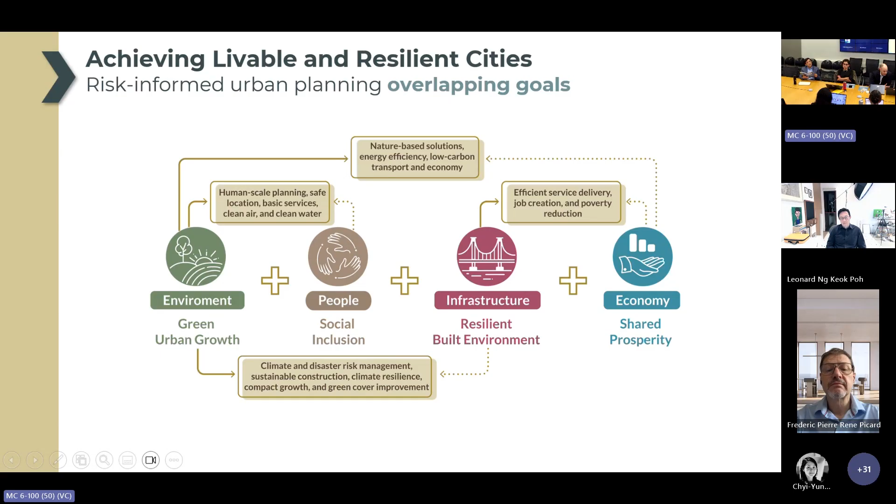We started out the presentation by showing how, as we're familiar with and how we tend to think about it, urbanization is commonly thought of as a driver of increased risk. This is what we're seeing around the world. But what we really are aiming to do with this publication is present and demonstrate how we can think about urbanization with a paradigm shift, to not be only a driver of risk, but actually as a driver of greater capacity and as a catalyst for greater resilience, if done so with better and more informed, more risk-informed urban planning.

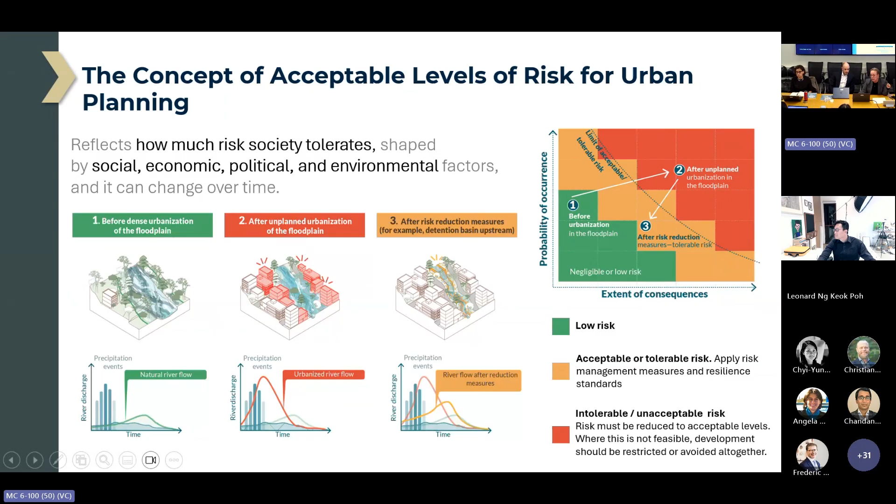So you will need to promote more risk reduction measures to be able to promote your development. Also, an important aspect of this concept is that risk is a dynamic factor. In an area that was not urbanized, that had a very clear floodplain, you can promote development very easily. But as urbanization happens, the dynamics, permeability, and conditions change. So those risk studies have to be updated with certain frequency, and the recommendations should be updated accordingly.

As mentioned before, this is an integrated process that combines different instruments: regulatory instruments like zoning, land use regulation, graduated planning, building codes, with financial and land management instruments that share the economic costs and benefits of urban transformation between the public and private sectors through land value capture, transfer of development rights, green financing instruments, or disaster risk financing insurance. This is complemented with compliance incentives like reduction of construction permit processing time and fees, and with capacity building to generate awareness and the capacity to develop the technical studies and risk reduction plans that are needed.

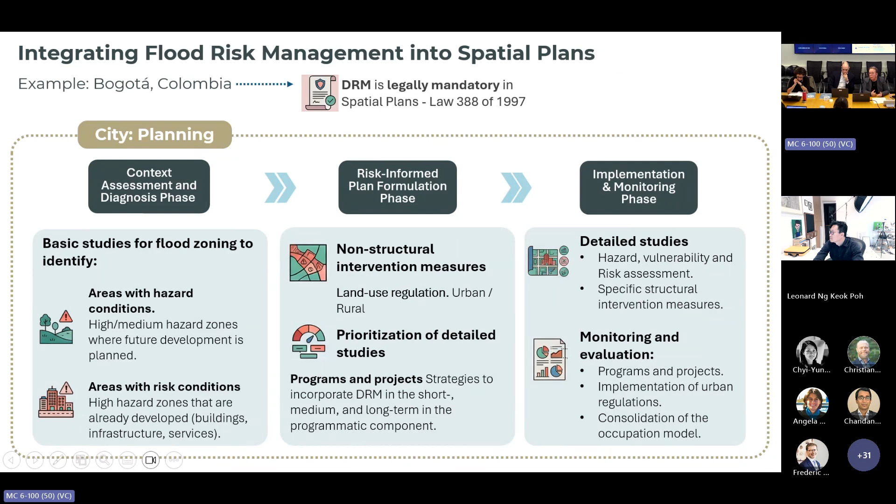As I mentioned before, during the diagnostic phase the city conducted hazard and risk studies in built and already occupied areas, and hazard studies for future development and areas of expansion. Based on those studies, during formulation, non-structural measures related to land use regulation, density, and type of uses are taken, along with prioritization of the detailed studies that are needed. This is accompanied by a program of investments for disaster risk management in the short, medium, and long term. During implementation, those detailed studies are carried out, along with specific structural measures, monitoring and evaluation of the programs, and enforcement of the regulatory measures from the urban development control perspective.

This responsibility is shared among different stakeholders. The city started with the official maps, included in the territorial development plan and the territorial development law, but this is shared with the developers. When a new urban development is proposed, they need to conduct mandatory risk assessments according to the technical recommendations of the Institute of Disaster Risk Management in Bogota. The results from the studies, the risk reduction measures, are reviewed by that institute, and if they comply with the terms of reference, depending on the results of the risk studies, if risk can be demonstrated to be lowered, the developer is allowed to continue with the license processing and implementation of the risk reduction measures.

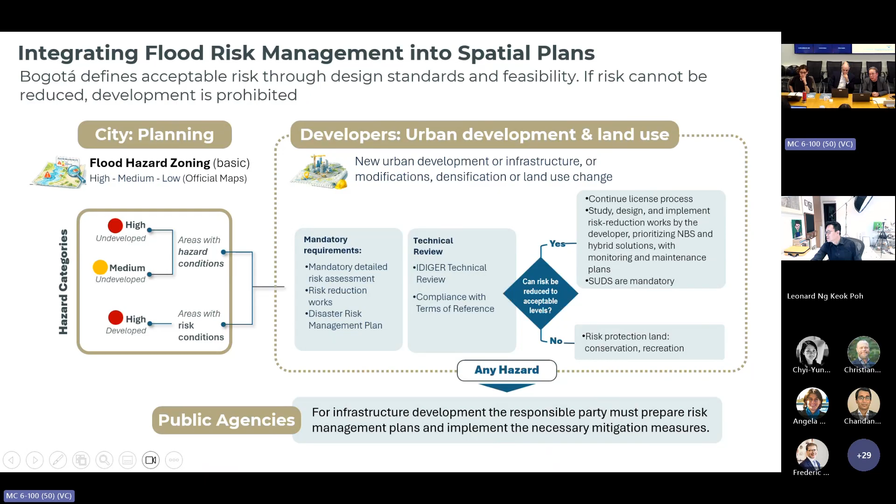Sustainable urban drainage systems are mandatory to lower, for example, the pressure on the stormwater system. It is also a shared responsibility between the city and the developers, while the public agencies are responsible for developing the main infrastructure and implementing the main mitigation measures.

Bogota is a very large city, divided into 20 localities or sub-municipalities. The minor localities are also responsible for developing more detailed studies for the smaller rivers and creeks, and based on those studies, defining the different types of measures and implementing risk reduction measures, implementing development control processes.

Complement this with all types of nature-based solutions, early warning systems, and risk reduction activities. One important aspect that makes this possible is that the city of Bogota has decided that 0.5% of the annual budget should be allocated for risk reduction. These progressive studies and risk reduction measures can be planned ahead and implemented because they don't depend on the current administration or political will. It's a progressive element enabled by a law establishing a mandatory budget.

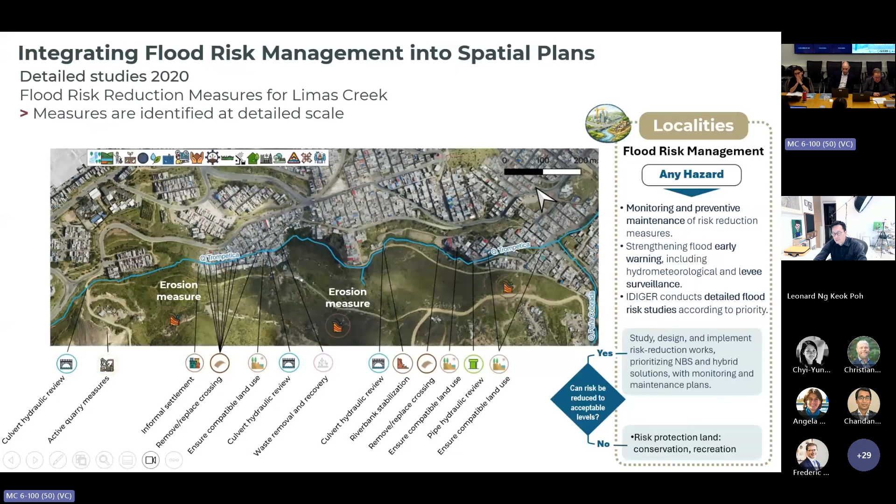Risk-sensitive land use planning is not an easy process. It requires strong governance, technical capacity, and financial and long-term sustainability. But we hope that the handbook will provide some examples on how to manage this for different hazards and help us scale up to resilient, sustainable solutions in the urban context, connecting people with opportunities for jobs, promoting private sector development, and promoting long-term economic development for our cities. Thank you.

Thank you very much, Anna. Every time Anna speaks, everything makes sense. But we know that in many of the client countries or the places we work, we're far from getting a law like the Colombian law that provides funding and mandate to do this.

We have the privilege of having today two speakers that will share with us how this is being done in real cities, with real populations, with real legal systems that sometimes help or maybe not so much to do this. Let me introduce our first speaker. I hope I am pronouncing this correctly.

Leonard Ng Keok Poh is a director for APAC at Henning Larsen. He joined the firm in 2008 and co-led the establishment of the Singapore office. He became a partner in 2016. His work focuses mostly on landscape-based, water-sensitive urban design that integrates flood resilience, public space, and sustainability into planning. In 2023, he received Singapore's President Design Award, Designer of the Year, which is the country's highest honor across all design disciplines.

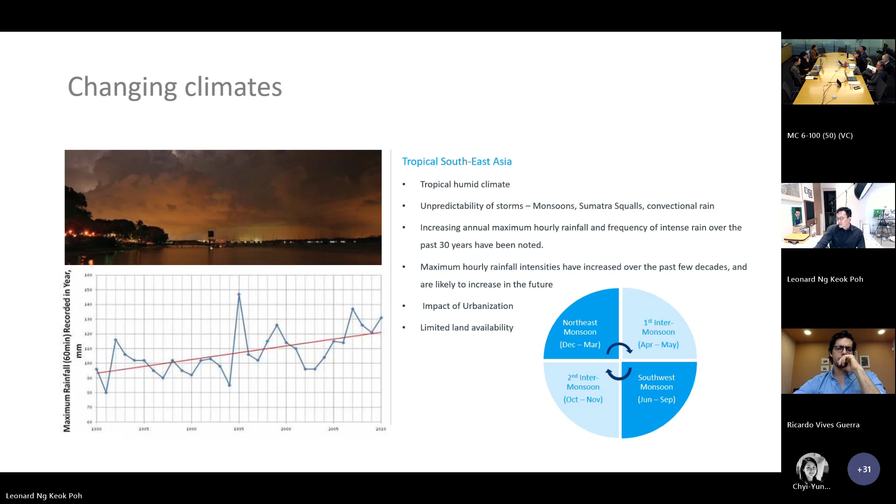I'm going to start by talking about the obvious, which is the fact that there is clearly a trend in climate change. We are seeing in Southeast Asia at least a significant change in weather events. We are having much stronger storm events where the original grey infrastructure suited for the rainfall is now overwhelmed. So there's a need for a mindset shift from an engineering-only based design to one that includes the combination of engineering and nature-based solutions. If you see from this diagram, it will show you that we have to embrace our whole physical environment as potential for stormwater management.

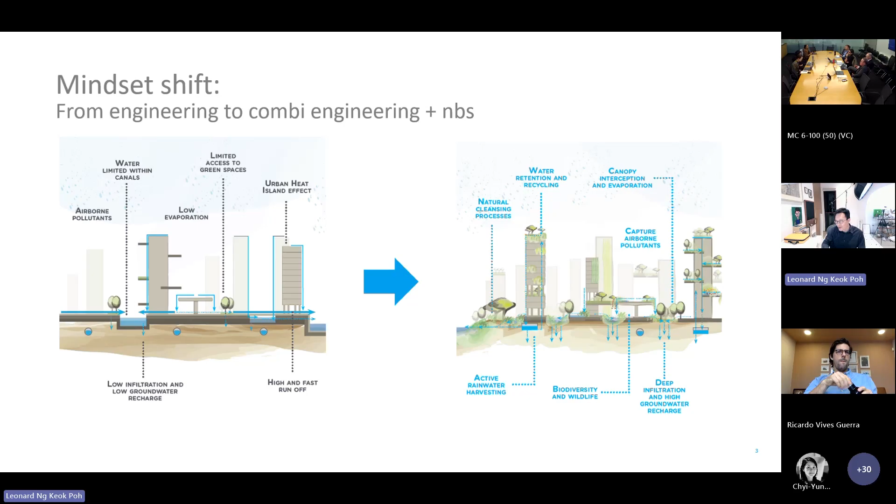This includes managing from source, pathways, and receptors. The old strategy is to get rid of water as soon as possible, but when it reaches downstream, it overwhelms the existing system. The entire urban space is actually a potential solution, including remediating how we control stormwater on site.

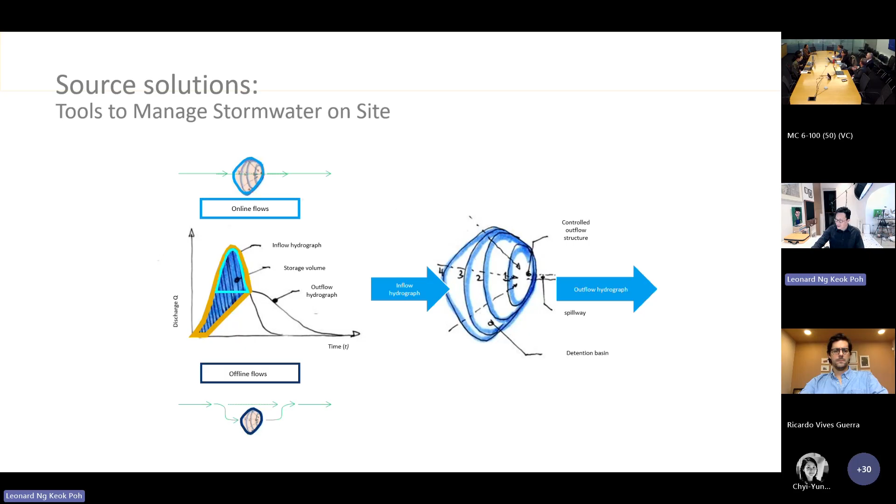That includes the use of a variety of solutions, and these tools allow you to control both the quality and the quantity of the water. It is only successful if you can create a treatment train to both improve water quality and remediate flood.

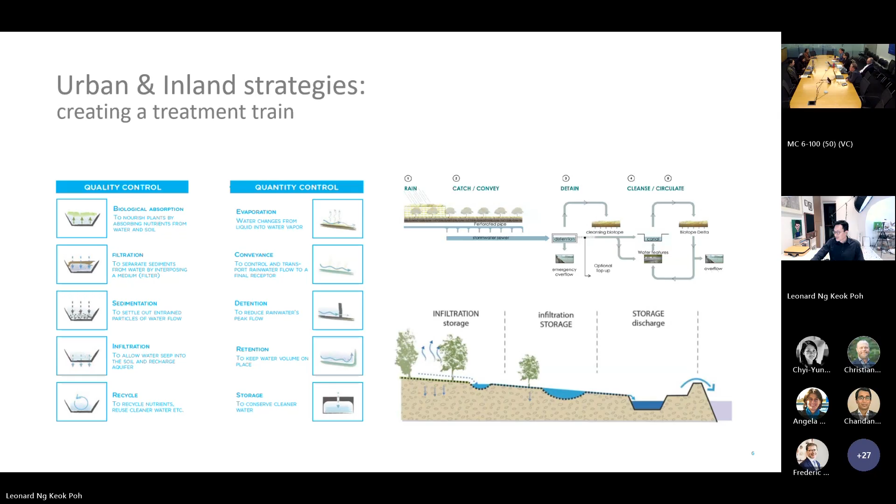But for this to happen, you need an all-of-society approach to solve this problem. I'll cite the example of Singapore, where there's a multi-agency effort, first managing the stormwater in a catchment, which is the purview of our water agency called PUB. They manage all the stormwater that falls within a catchment, how it moves through the system, and where it is managed and stored.

They're also in charge of handling storm surges that come in from the sea. Sea level rise combined with more high-intensity storms is what causes the intense flooding we see in many cities these days.

Then there's our master planning agency called the URA. They plan around the drainage plans imposed by the Public Utilities Board. They have the master plan that controls our 20-year planning horizon, and after that, at the next scale, are the development guide plans imposed on private developers.

Then contributing to all this planning are the quasi-government agencies and private developers, who take all these guidelines and realize them within development plans. With this all-of-society, large-scale implementation, only then can you actually address the issue of flood risk.

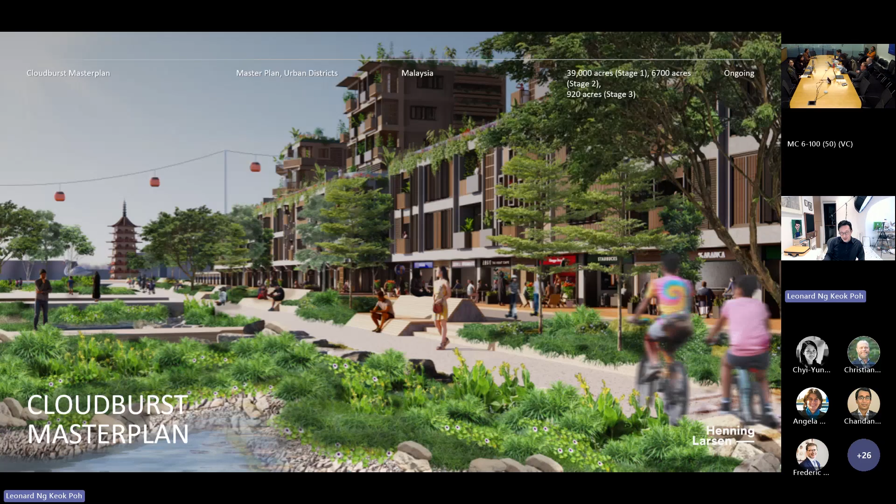I'm going to show you an example of a project we are doing for a city in Malaysia. This city is in Sibu. It is very low-lying, near the river delta - you can see it's next to a river. Due to climate change, it floods a few times a year, serious flooding that is impacting the economic viability of the city, but it's also causing a drain in the population. People are moving out because of climate risk.

The problem is compounded because it's built over peat soil. The soil is soft, saturated with water, and next to a major river. So how do we come up with a development that can deal with the risk inherent in such a vulnerable environment?

The first thing we need to do is engage with all the valid stakeholders, the people who are there, the ones most impacted by this vulnerability. We talked to the villagers, the government officials, and the town officials, and gathered a wish list from them, so we can keep that top of mind, because they are the ones who would actually benefit or suffer from any decisions made.

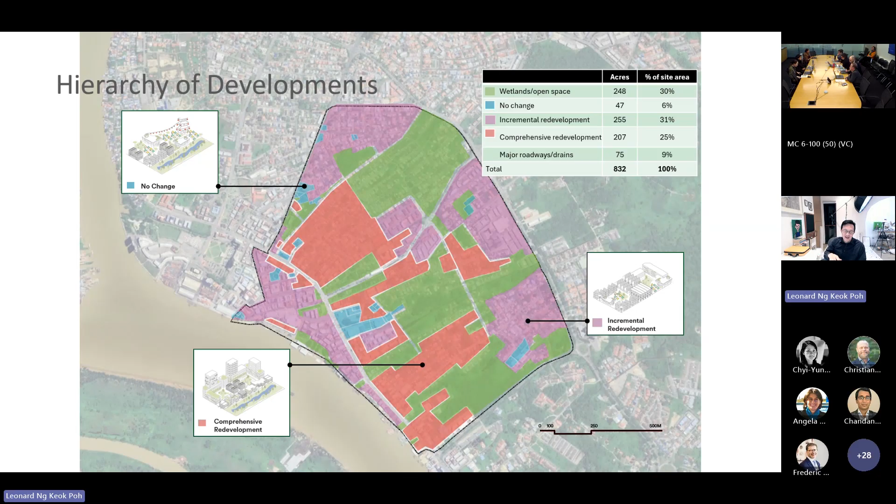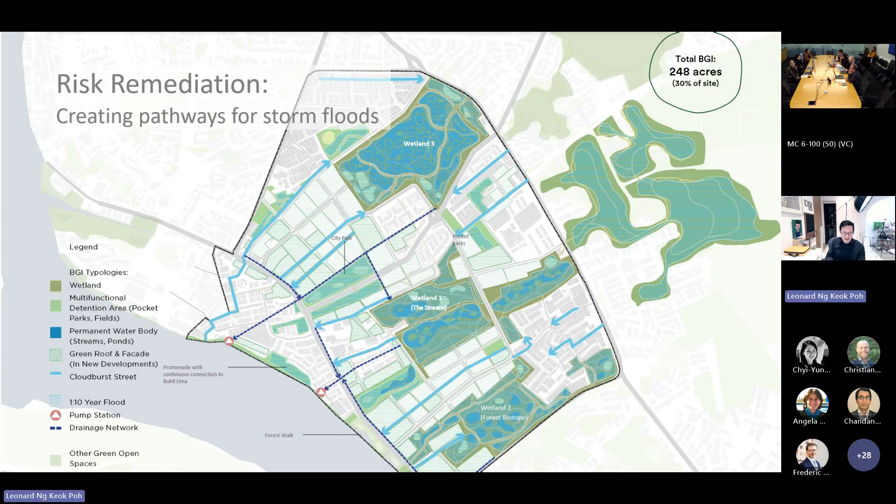Then we have risk remediation. In this case, we are creating pathways for storm floods. So in this new urban fabric, where can the water move so that people are not overly impacted by climate change?

We create visualizations to help the public understand what they will be getting. In this case, you do not have to sacrifice your livability to be able to live with water. In fact, we are visualizing a new typology where people can live with the environment in harmony, where animals can roam freely and have protected zones, and people can still have recreational areas.

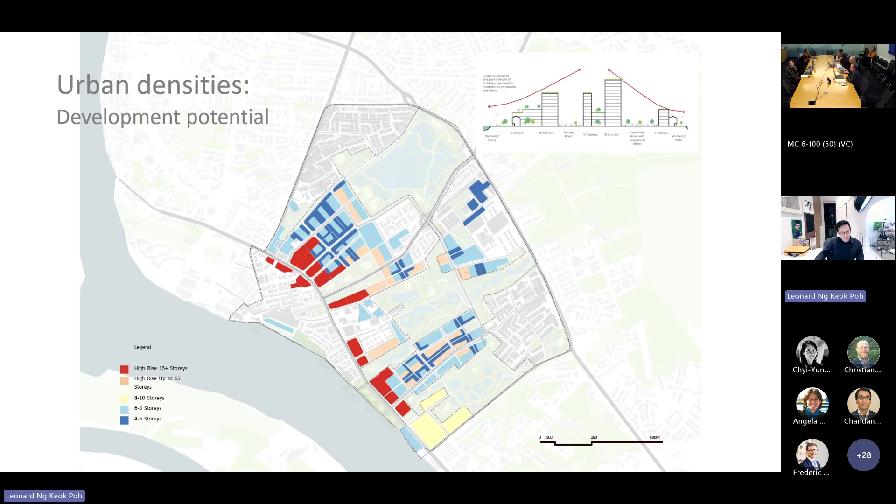It's also important to collect data to understand the development potential, because we cannot dedicate all land just for flooding. We have to provide spaces for the city to grow and to prosper. This is a density map showing the different levels of development.

This is the overall master plan framework at the end of this exercise, where we list out where they can develop, where they cannot develop, and where they can have higher levels of development. What is the relationship between this development and the nature areas and flooded areas?

And finally, this is a visualization of how this new city can look - a city where humans can coexist with nature, where climate change did not disrupt daily lives, where there's a space for nature and a space for water to coexist.

There's one stage that a lot of people forget. It doesn't end with the planning. Staging is a large part of the success of every project. How do we stage projects for success?

Like most sites, there are actually people living there. So how do we make sure that their interests are taken care of? The next is, where do we plan the blue and green infrastructure within this fabric? And then how do we attract private and public investments in order to fund this infrastructure?

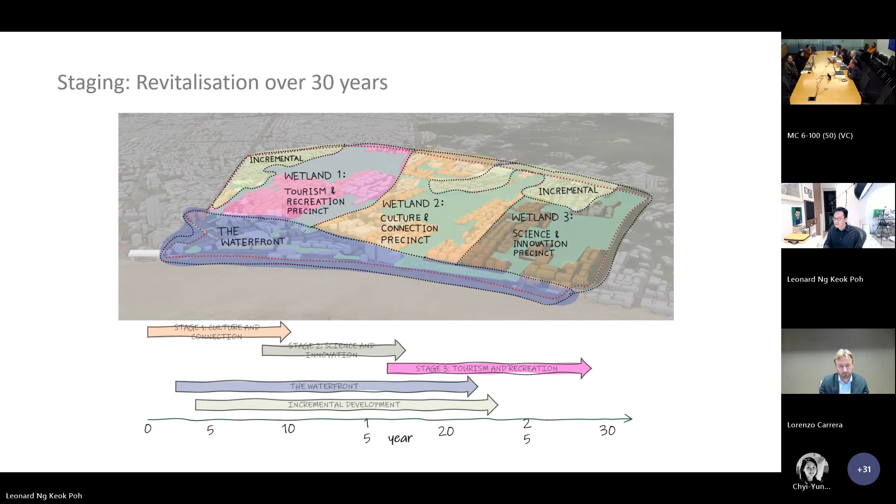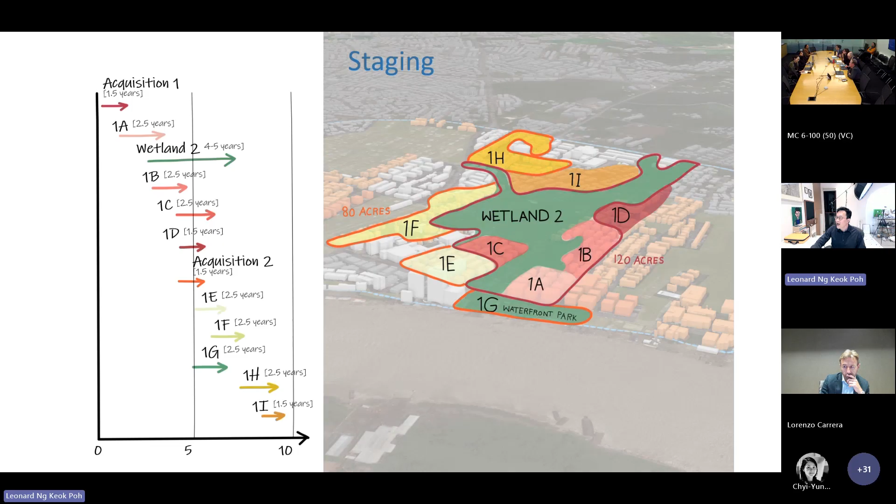This is the staging diagram of how these different parts will grow through the process. And then finally, an important part is how do we work with the private sectors for them to get a buy-in and be co-developers in our development.

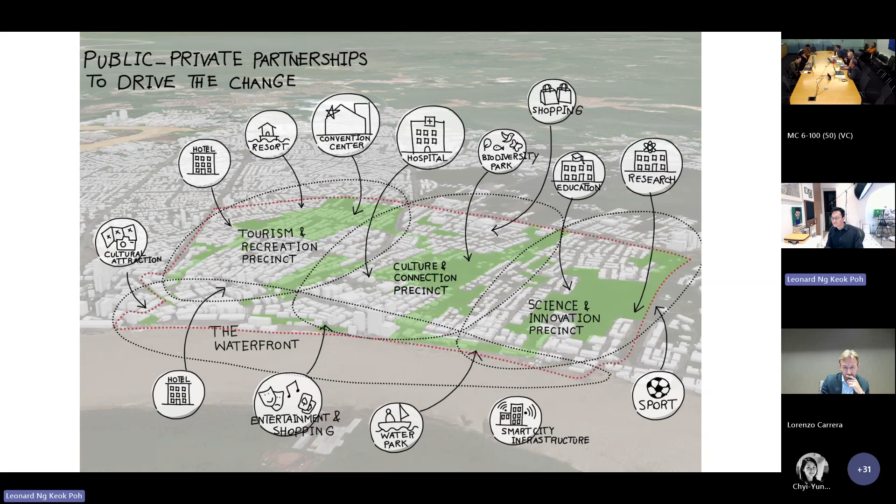This is the phasing diagram over the period, allowing the development to grow gradually and organically, with this development framework as a guide - a broad guide that will lead them into the future.

We have an example from many years ago in Ørestad, Denmark, where we were appointed as a consultant to plan this plot of land. This was a really low-level swamp land, valued at $5 per square meter.

At the end of the planning, it could be sold for 1,000 per square meter, and yet provide affordable housing at the fringe of Copenhagen. It's a really good example of a win-win situation where you take the challenge of climate change and turn it into an advantage that benefits both the public and private sector.

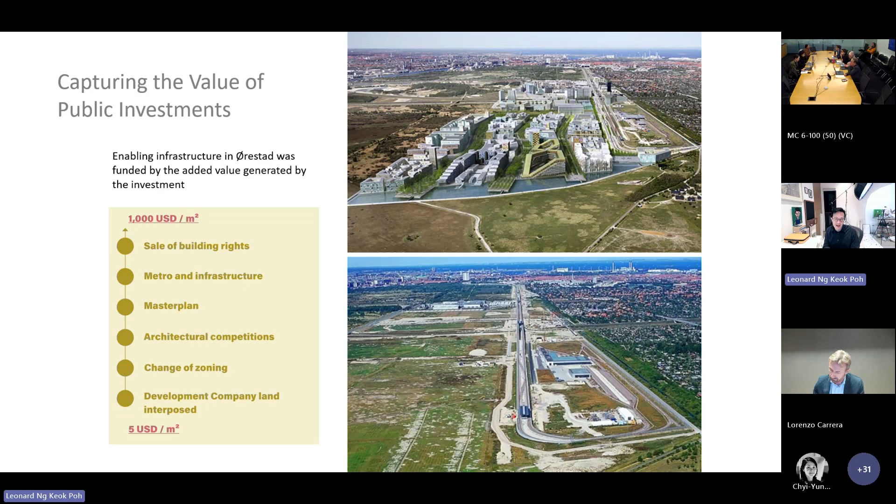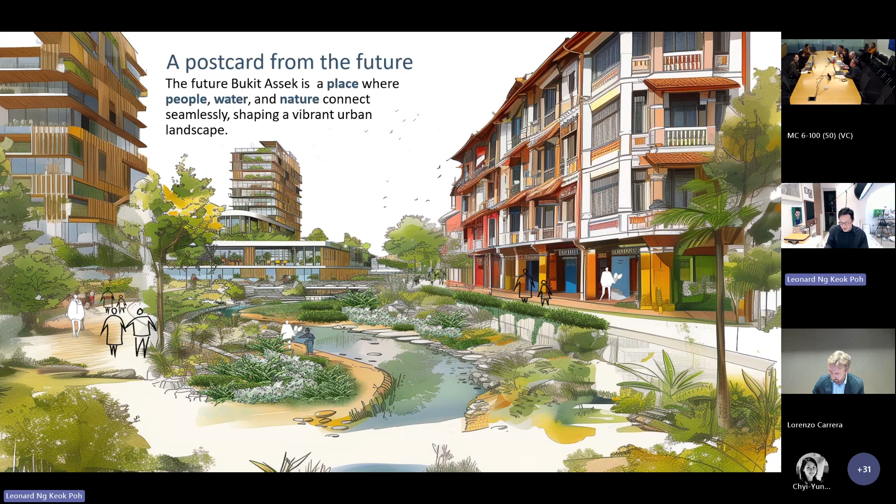I'd like to end with a postcard from the future, where the traditional can live with the modern, the built can live with nature, and man can coexist in harmony with the environment. Thank you for your attention.

Thank you so much, Leonard. This is wonderful and very inspiring, I think. Very interesting to see how the process unfolds. I have lots of takeaways I wrote, but in the interest of time, I'm going to invite our second speaker to come in and share the experience from Colombia.

Our next speaker is Ricardo Vives Guerra. He's an architect and urban strategist with over 15 years of experience leading large-scale urban transformation projects in Latin America. He has worked across public and private sectors, serving as president of Puerta de Oro, the economic development company and advisor to the city of Barranquilla, which has undergone tremendous transformation in recent years. Ricardo will reflect on Barranquilla's experience and show how risk-informed urban planning, combined with land value capture, can help finance flood resilience while bringing the best of what urbanization can provide in terms of jobs and private sector opportunities.

Ricardo, over to you. Hello, thank you. Good morning for me, everybody - I guess it's morning also in Washington, just a bit of a delay. I'm so happy to be here sharing this experience with you guys. I'll add myself to Leonard's congratulations on the handbook and how useful a tool it is. I'm happy to share some of the work we've been doing here in Barranquilla and across Latin America, and hope it's of service. Can you please let me know if you can see my screen?

I was born and raised in Barranquilla. This is the city where I grew up. It's nice, tropical, Caribbean, but it looks kind of gray and dull in a way. This is what people had in mind when they thought of Barranquilla. But in truth, Barranquilla has another side, a neglected side, which is the Magdalena River, the most important river waterway in Colombia. We just weren't recognizing the presence of this magnificent landscape that we were granted.

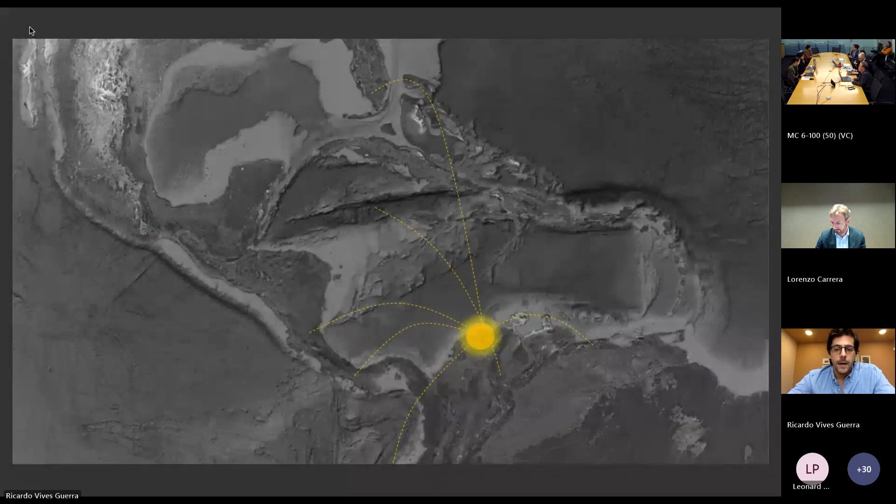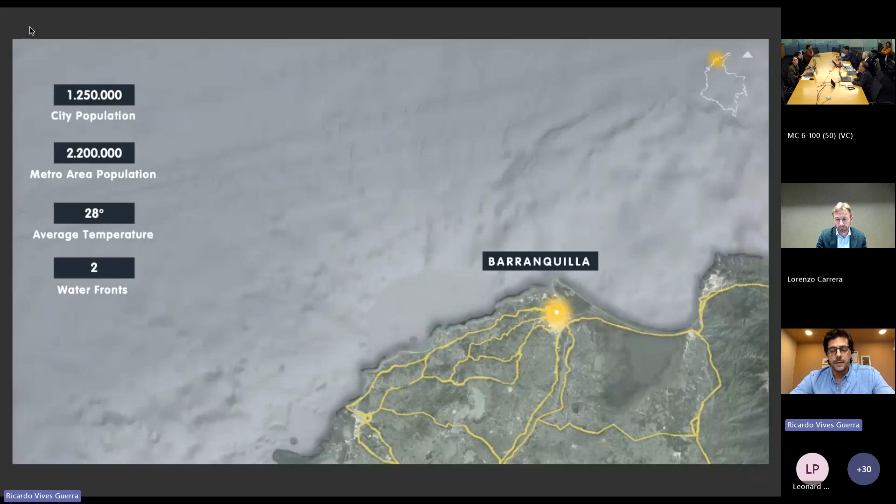Barranquilla is a coastal, Caribbean city. The reason Barranquilla now has 2.2 million inhabitants is because of its location on the Magdalena River Delta. It's summer all year long, but we have two waterfronts: the Caribbean Sea and the Magdalena River. This is where we are at, where we were a few years ago. It's a compact city, with some urban sprawl, which we'll see in a bit.

The main concept in this image that I wanted to share is that the waterways, the location, and the landscape were completely neglected for many years.

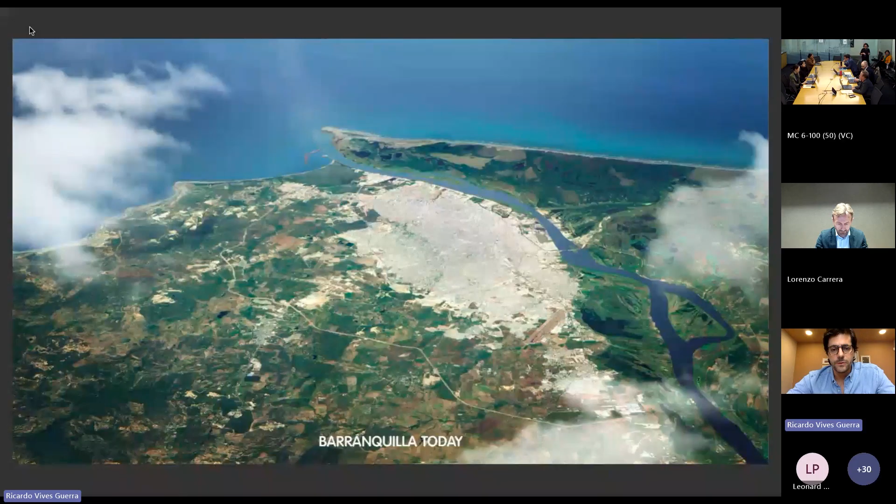Just for context, just before 2008, Barranquilla was a city in despair and poverty. 43% of the population was considered poor, while the national poverty rate was around 25%. 67% of schools were under the performance indicators, with 60,000 kids out of the school system. There was only 10% park satisfaction, and 60% of people lived more than 1.6 kilometers away from a healthcare center.

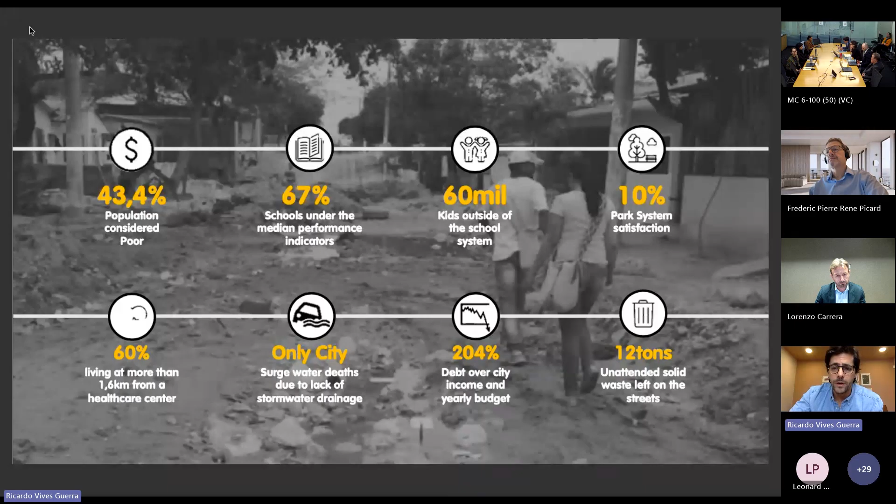It was the only city with rivers running down its roads, called arroyos—stormwater surges in the streets—and it was a city indebted over 204%, with tons of solid waste in the streets.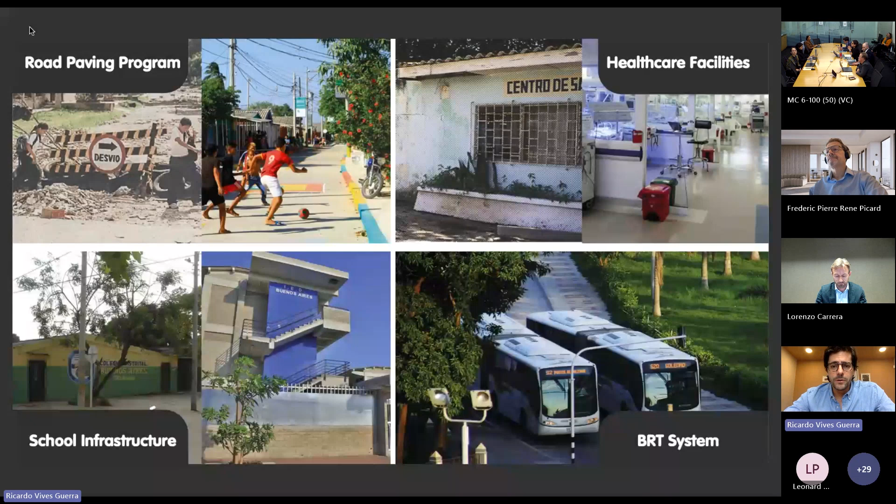Then in 2008, there's a switch. A new political project comes into power, and a lot of things started to change, starting with the very basic things like paving roads, refurbishing healthcare facilities and school infrastructure, and installing the first BRT system. Then more sophisticated things for our context, like an LED lighting system in the streets, and a public tree nursery which enabled a landscaping agency to be born. The whole city started to become a lot greener, and we also jumped into big events like the Central American Games in 2018.

I want to highlight three projects from this time. The first is the Art Park system, which is the WRI Ross Prize for Cities winner, a fantastic project with citywide same quality of urban furniture for the parks, but also because they're co-created with the communities. Every community participates in the design, and there's always a park ranger, a person from the community designated to maintain the park. It's a really beautiful project that changed the identity of the city.

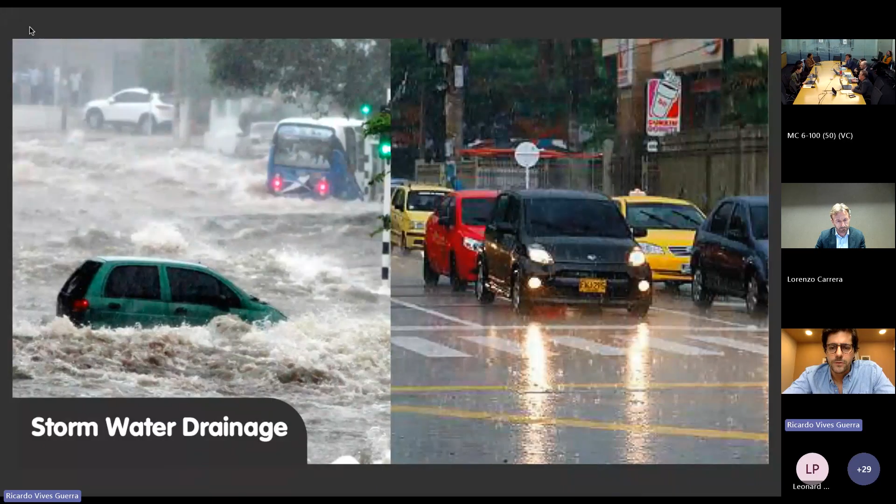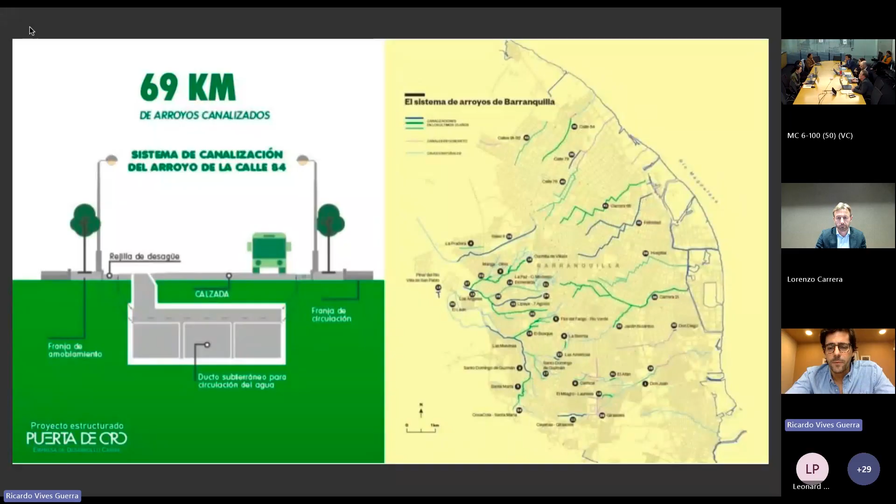Then there's our lifelong negative brand, which was our arroyos, or stormwater, which was basically never an engineering problem. There was even a famous minister in Colombia who said the only solution to our stormwater surge problem was moving the city. But in reality, it was never a problem of engineering. The engineering was there—there's more or less 70 kilometers of waterways that have been solved.

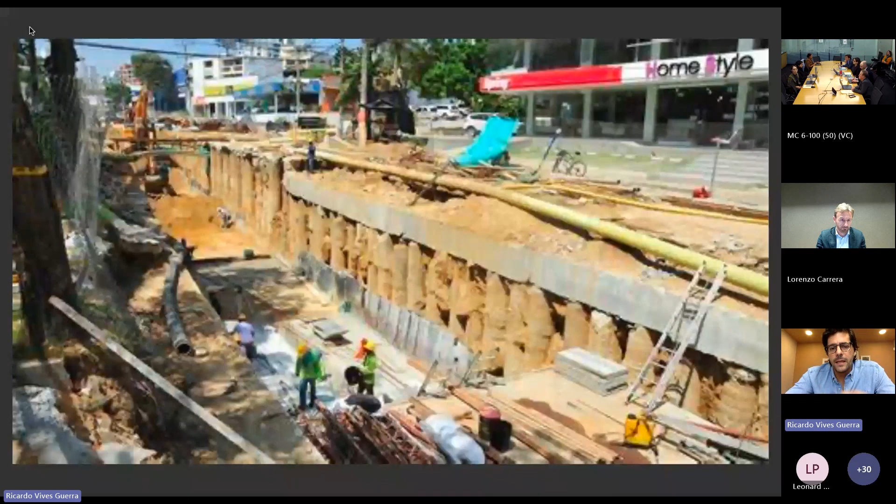The problem was financial. In the end, after building trust in the city and people starting to pay more taxes, we were able to do something like a forward, or a kind of TIF—though not under the TIF umbrella—a finance mechanism which ultimately allowed the solution for our lifelong tragedy of surge water that killed people.

This is something I want to talk more about in a few seconds. But as the city started to change and all these projects started to build, the city started to grow financially, economically, and also in population. And this brings new challenges, unknown for us up until 2019.

Basically, we're talking about new roads and new logistics infrastructure getting built. And land is always owned by somebody. Somebody has an opportunity for economic growth, and sooner than later this happens, and this is definitely something we want to avoid. This is basically what was happening in Barranquilla.

Over the first 200 years of existence of the city, there was more land consumed in the last 20 years, 10 to 20 years, than in the first 180 years since the city was born.

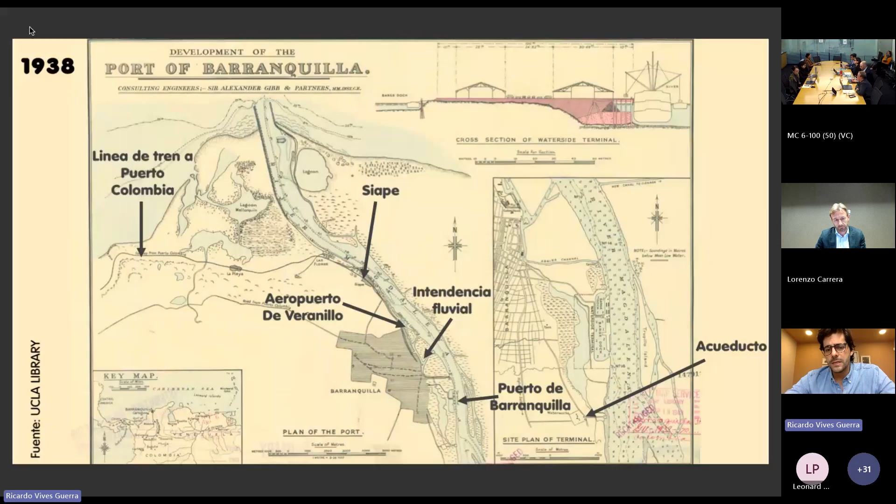Barranquilla has always been a city of water, by water, for water. It was a port city right after the Industrial Revolution, with steamboats coming up the river, and Barranquilla started to spur. You can see in this image one of the first maps of the city - the river is there, and our city is basically there because of the river.

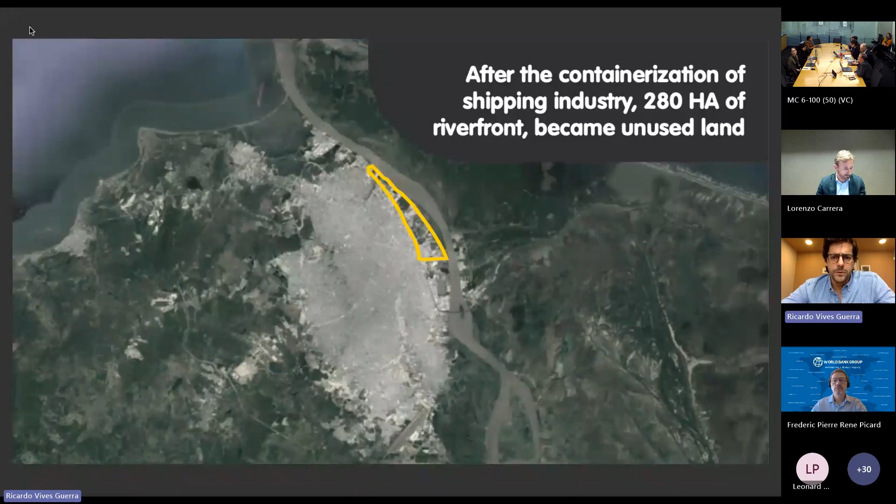But after containerization of the shipping industry in the 80s, as happened all over the world, part of our riverbank was neglected and no longer useful, no longer needed for industries to set themselves right next to a river. So we ended up in 2019 with a gem we didn't realize we had: 280 hectares of central, serviced land with transportation, water systems, and electrical works already in place. There was a whole lot of potential for rebuilding, which was basically unused.

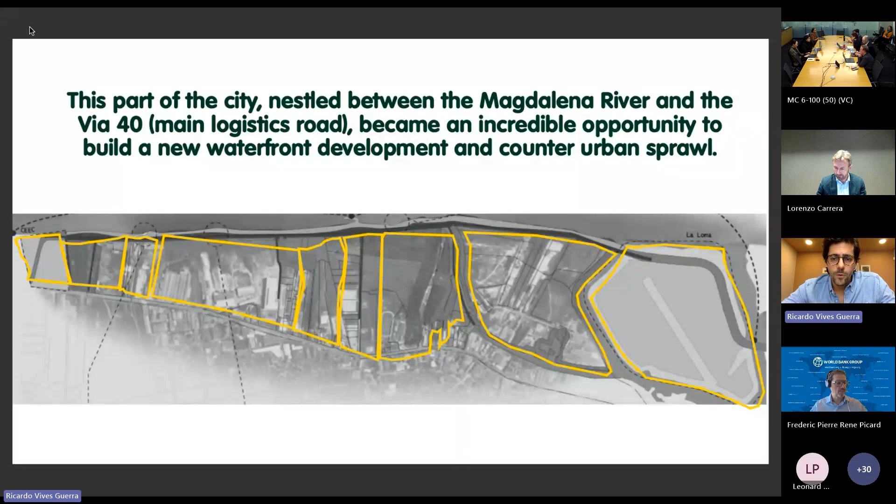In 2015, this was a strip of land which basically didn't exist in the top of our minds - a few dying industries, but mostly brownfields and greenfields of old industrial or basically unused land. This part of the city, nestled between the Magdalena River and the Via 40, a main logistics road, is an incredible opportunity to counter sprawl, but also to create a new and better part of the city for the 700,000 people that are coming.

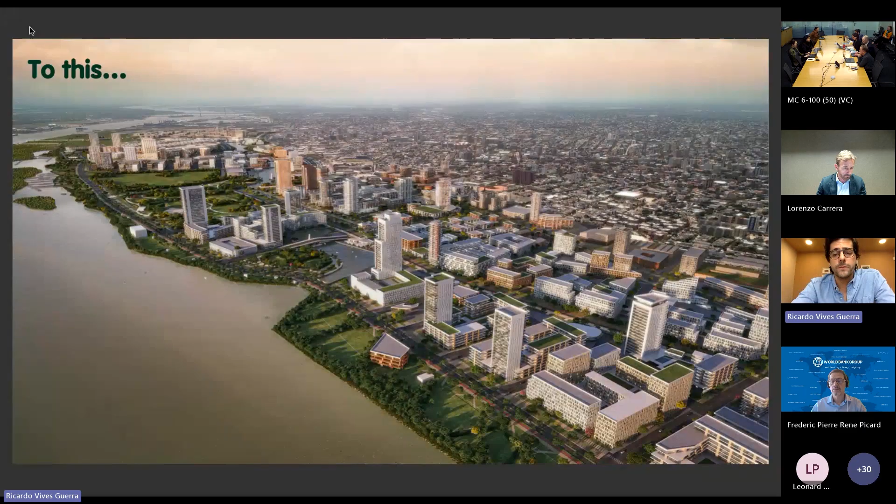So we did a master plan, and this is basically more or less what should be happening there, turning this part of the city into a walkable, livable, 15-minute city, or part of the city that should happen in the riverbank.

So what has happened in recent years - this whole process of turning our face again to the river started in the 80s. Japan was already working on their waterfront, so an expert mission comes to Colombia and to Barranquilla in the 80s, and they say, listen, you guys are looking the wrong way. You should be looking back to the river.

We weren't ready yet. But in the year 2000, with the first land use and zoning policy for the city, the first regulations and rules for how to develop a city were set. This was a major component, not only in Barranquilla but also in Colombia. Then in 2009, the second land use and zoning policy comes out, and this is where the foundations for the recovery of public space were set, and the first long-term vision for the city was actually built.

Because of the success of the city and what was happening, by 2014, five years later, the land use and zoning policy had to be revised. This is a major milestone, because this is where the city starts dreaming and putting into paper what it would actually want to become. And this is the first time that we see the river in the central stage.

And then from there on, projects that we just mentioned, like the convention center and the Malecón, which is the river walk we're going to see in a bit - and then the master plan. What finally happens only very recently is that real estate developments start to spur, with the first housing units being built as we speak.

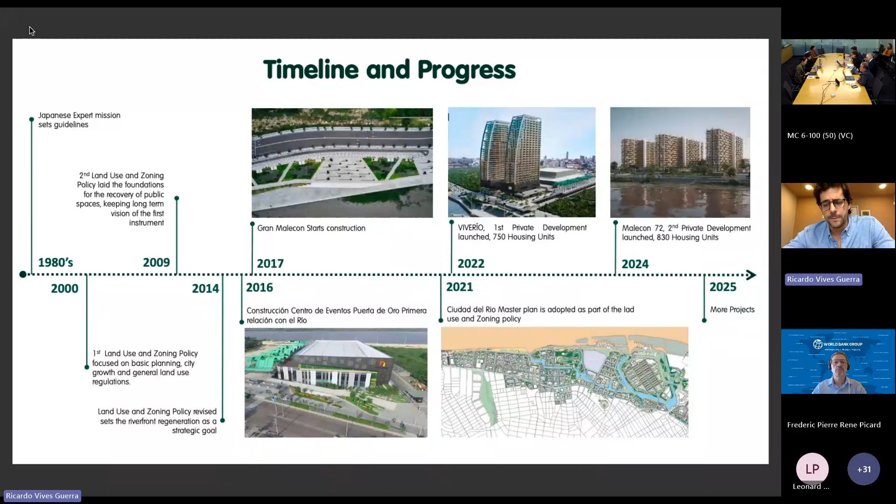So what is the Gran Malecón, and how does this whole city by the river start? There were six challenges basically. We're going to go quickly and focus just on a bit of those, but basically, the riverbank was disconnected and forgotten.

It was private land. There were a couple of vulnerable neighbors to the project where it wanted to be built. It was a flood-prone area, and it's a very long execution time for the project. And it's actually a huge bet with very uncertain returns.

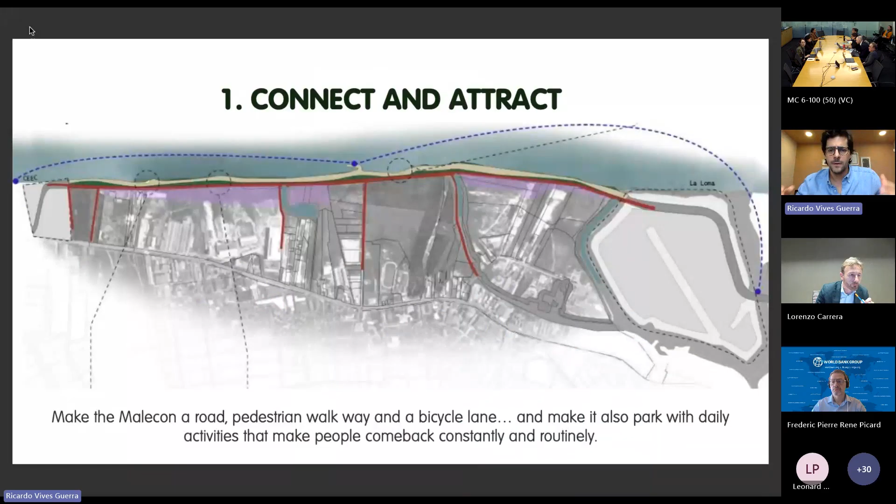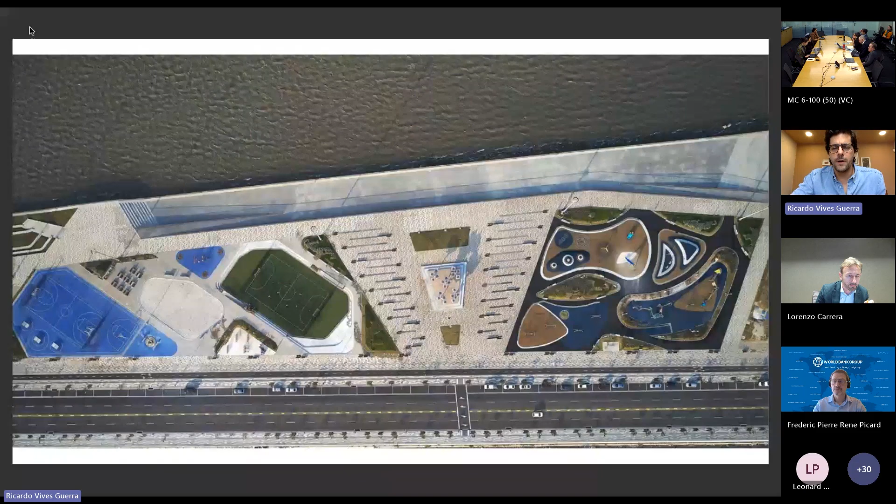So how do we bring this part of the city to the top of mind? We had to somehow connect the riverbank to the city, and not only connect it, but make it interesting and attract people. This is what we were talking about, the city basically neglecting this part of land. After the Malecón, which is basically a park, a boardwalk, but more than a boardwalk, a park and a road, you open up the city and give it a new front, a new face to show.

The second highlight of the project is that the land was privately owned, and we had to secure it without dispersing or spending the budget we had just buying land, which is a huge problem for most of our cities in the developing world.

So we had to do a lot of artistry in creating and backing national laws, in which land transfers are done in exchange for development rights, but done in advance, which was kind of the novelty here.

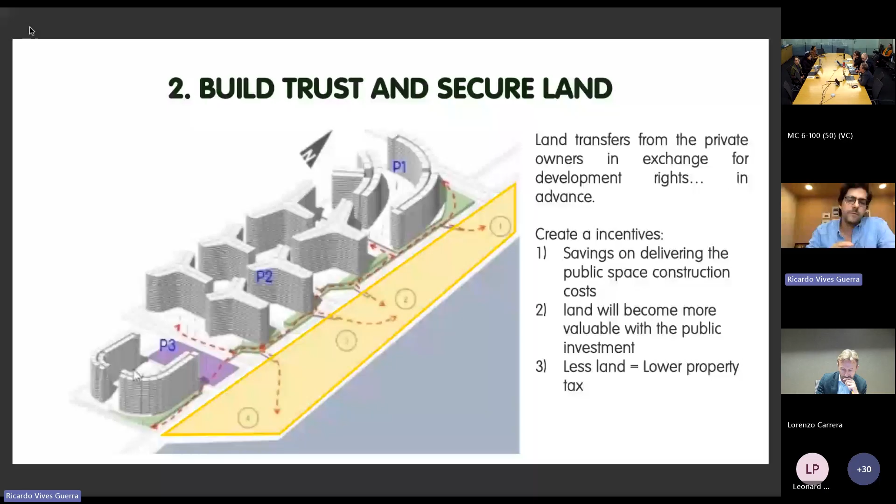That was only possible because of the trust the city and government had created with landowners, who were able to believe and see that if they gave the land in advance, a beautiful park would be built, and then their land would be more valuable for real estate development. And this is what happened. Now their riverfront has a beautiful park, a road, and a connecting road.

Then we did a lot of work with the communities. The two neighboring communities are part of the Malecón. They're part of the staff, the tour guides, the cleaning staff, the maintenance staff. This really helped them become engaged and feel ownership of the city. It's not just a project for the entire city, but also a project that benefits both of these communities.

This one I love to talk about because it's unperceived. People see a park, a boardwalk, a river walk, but it's actually a lot more than that. It's resilience infrastructure in the end.

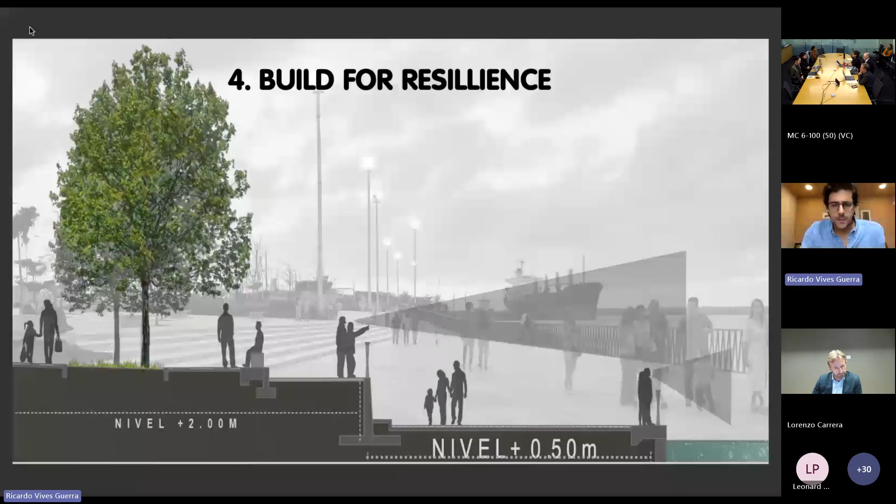This is what we had in the riverfront. Basically the entire 280 hectares of land were a flood-prone area that would easily suffer under new climate change conditions. So we had to build heavy confinement infrastructure with a proper drainage system. The debate on softer or harder engineering solutions all depended on counterbalancing. If we did very soft solutions, we wouldn't fit too many people on this land, and most of the 280 hectares would have gone into greenery, which was a really great solution.

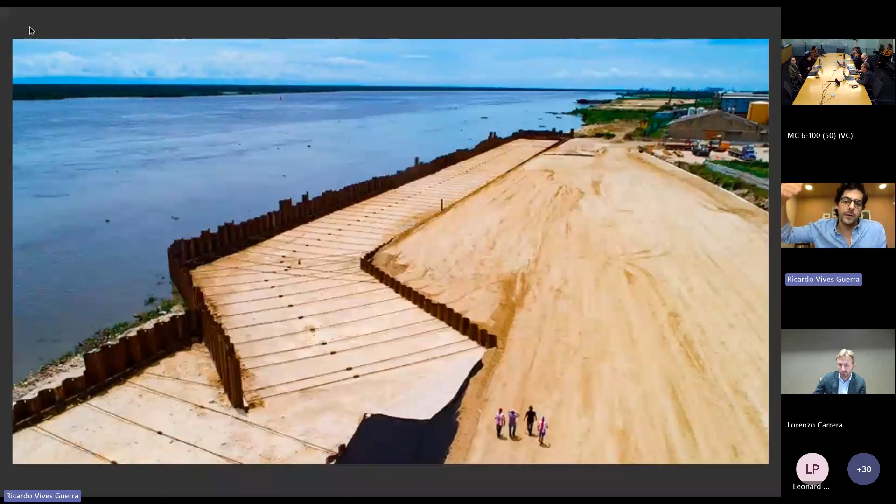But in a balancing act, we had to opt for a harder solution that would give space for more of the 280 hectares of land to be used for people, counterbalancing urban sprawl. So this is what we ended up with, a new front of the city right on the riverwalk. To create a sense of closeness to the river, we designed floodable areas. This is one of the floodable areas that allows people to change from a balcony-type relationship with the river to a more intimate, almost touch-the-river relationship.

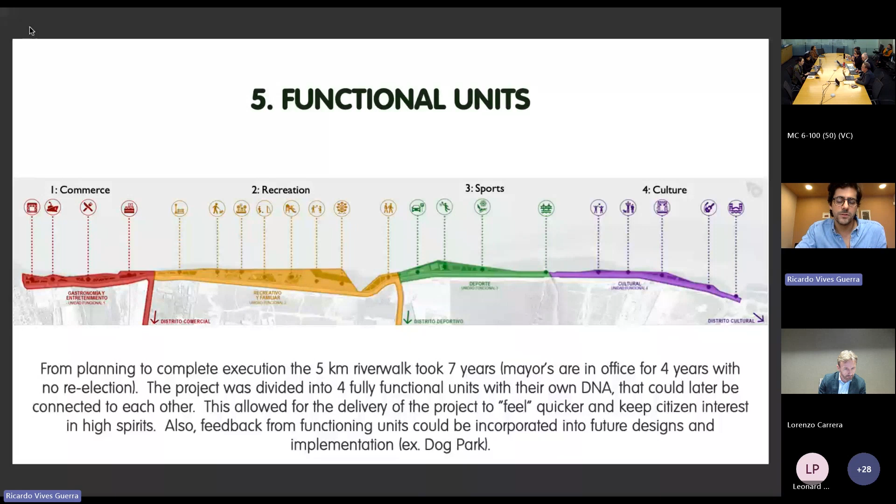We split the project into 4 functional units, basically to manage the expectations of people. So every year, a new part of the Malecón was built. It was fractioned into 4 just to ease the people's and the city's expectations and earn their trust that it was actually being built as we speak.

And finally, our riverwalk is only as good as the people that go there. So a whole operations and maintenance infrastructure and budget was set up for the long term, just so we could have food vendors, concerts, and cultural and recreational activity that would keep the infrastructure alive and secure that the investment would be returned, creating a new postcard for the city, which is basically what is happening.

And just a final note on the framework for this project, which is a real challenge that we have in developing countries. There's always the central idea or starting point of what needs to be done. In this case, we needed to counterbalance urban sprawl, secure flood-prone areas, and create more livable space for the city and its dwellers.

So there was an obvious thing that needed to be done, but it's not always so clear what needs to be done. There are cities that start building stadiums without a need, or massive projects that really aren't needed. Second, you just try to manage and find out what you can do. Sometimes it's engineering, sometimes budgeting, finance, permitting, or laws, and a lot of projects get stuck when this interaction doesn't fit. You know what you need to do, but you can't do it right now, or you can't do it at all.

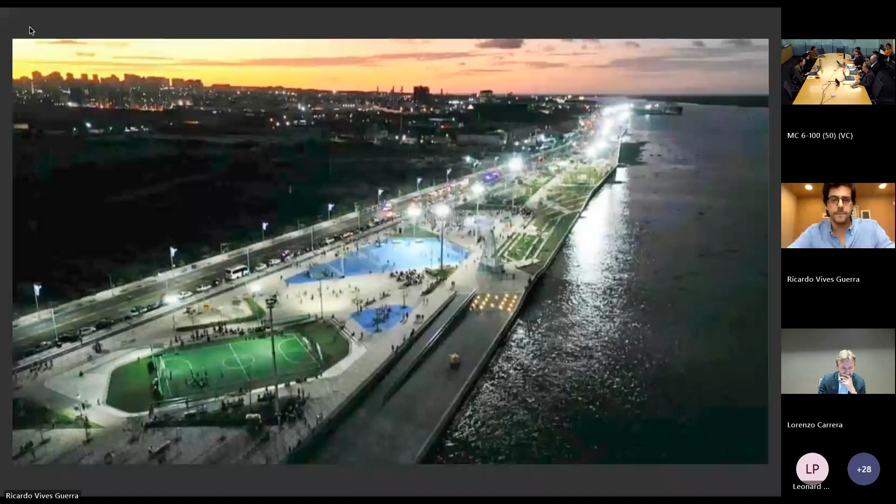Thank you. Thank you, Ricardo.

Very interesting. I used to work in Colombia and in Barranquilla when it was still an idea. So it's really wonderful to see this a reality now. Congratulations.